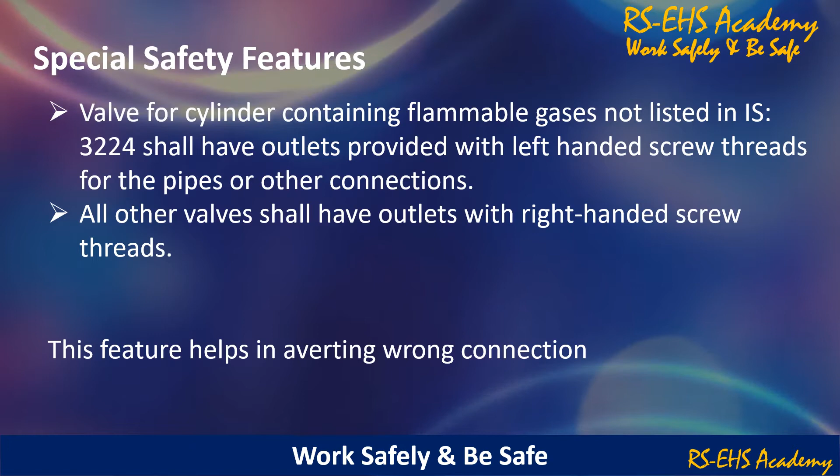Cylinder safety relief devices. The cylinders manufactured in India, if fitted with safety relief devices in their bodies, shall have them manufactured and maintained in accordance with IS 5903. The cylinders containing obnoxious or poisonous gases shall not be provided with any safety device.

Competent in charge for the operations. Every person holding or acting under a license granted under these rules shall, whenever cylinders are filled, loaded, unloaded, examined or tested, depute a competent and experienced person to be present and to conduct any of the said operations, and the name, qualification and experience of such personnel deputed in each shift shall be furnished to the Chief Controller or Controller for considering filling permission round the clock.

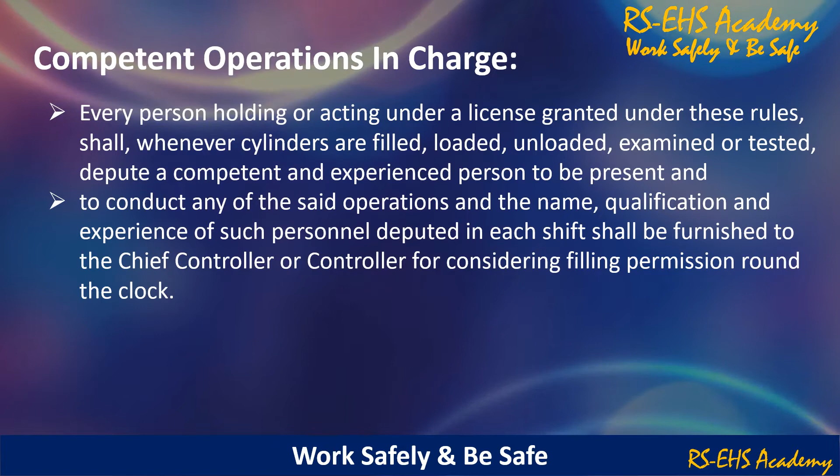Cylinder filling restrictions and repairing. Welded cylinders shall not be used for filling any permanent or high pressure liquefiable gas like boron trifluoride, carbonyl chloride, that is phosgene, chlorine trifluoride, cyanogen chloride, hydrogen cyanide and hydrogen sulfide.

No person shall repair or cause to repair any leakage in the body of a seamless gas cylinder. Welded or brazed cylinders showing leak at any place other than the welded or brazed seams shall not be repaired and shall be rendered unserviceable.

Storage of cylinders. The cylinder shall be stored in a cool, dry, well-ventilated place under cover and away from boilers, open flames, steam pipes or any potential sources of heat, and such place of storage shall be easily accessible. The storage room or shed shall be of fire-resistant construction.

Thin wall cylinders such as liquefied petroleum gas cylinders and dissolved gas cylinders shall not be stacked in a horizontal position. The cylinders containing flammable gases and toxic gases shall be kept separated from each other and from cylinders containing other types of gases by an adequate distance or by a suitable partition wall.

The cylinders shall not be stored under conditions which will cause them to corrode. The cylinders shall not be stored along with any combustible material. Empty cylinders shall be segregated from the filled ones and care shall be taken that all the valves are tightly shut. For an example, we have shown oxygen gas cylinder storage here.

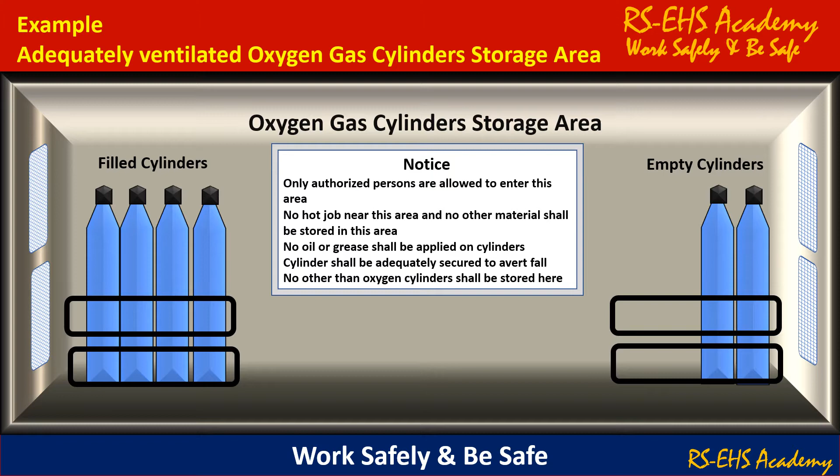Cylinder subjected to the action of fire. A cylinder exposed to fire shall not be used unless it has undergone proper examination and hydrostatic or hydrostatic stretch test. Dissolved acetylene cylinders which have been damaged by fire shall be condemned and destroyed by a person conversant with hazards involved in handling of dissolved acetylene cylinders and also capable of handling a situation arising out of accidental explosion of cylinder during condemnation.

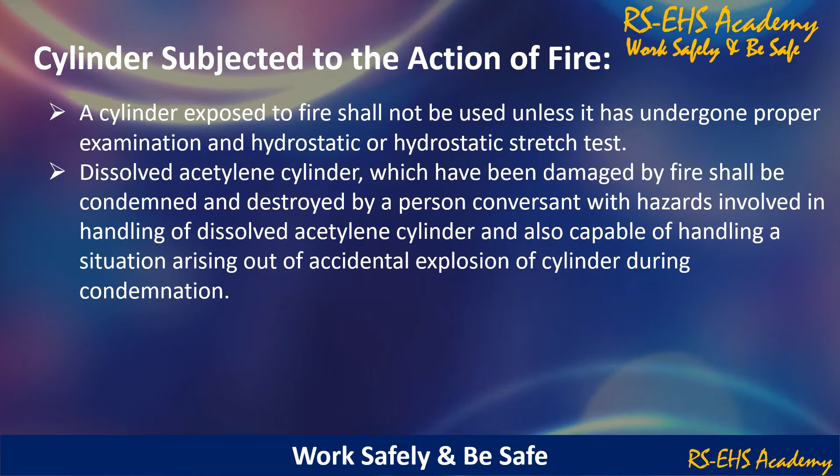Condemning of cylinder. Any cylinder which fails to pass periodic examination or test, or which loses in its tare weight by over 5%, or which for any other defect is found to be unsafe for use, or after expiry of the service life of the cylinder, shall not be filled with any compressed gas and shall be destroyed by flattening it as a whole or after being cut into pieces in such a manner that the pieces cannot be again joined together by welding or otherwise to form a cylinder, under intimation to the owner of the cylinder as specified in IS 8198.

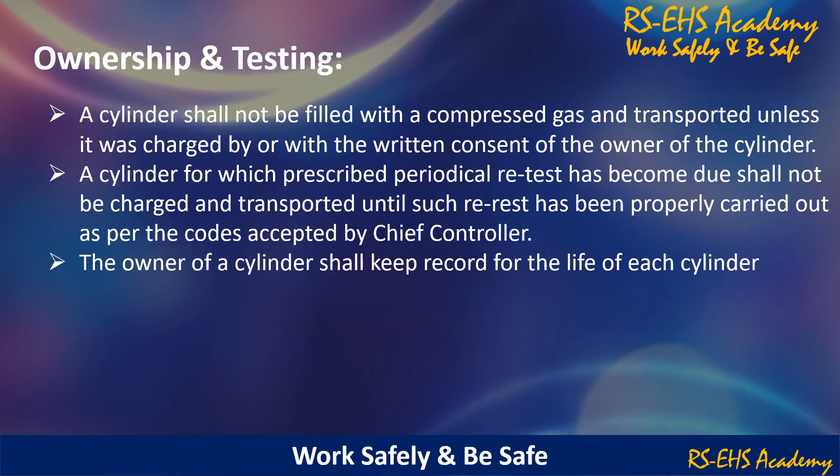Ownership and testing. A cylinder shall not be filled with a compressed gas and transported unless it is charged by or with the written consent of the owner of the cylinder. A cylinder for which prescribed periodical retest has become due shall not be charged and transported until such retest has been properly carried out as per the codes accepted by the Chief Controller. The owner of a cylinder shall keep record for the life of each cylinder. Let us go through the additional requirements for dissolved acetylene cylinders.

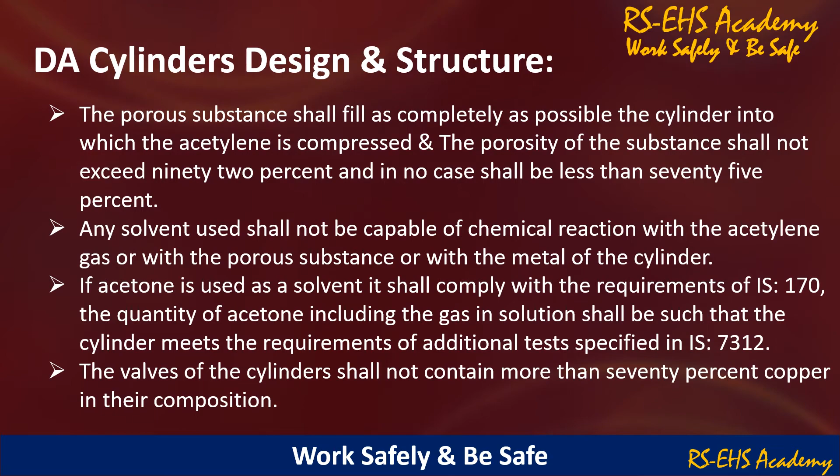DA cylinder design and structure. The porous substance shall fill as completely as possible the cylinder into which the acetylene is compressed, and the porosity of the substance shall not exceed 92% and in no case shall be less than 75%. Any solvent used shall not be capable of chemical reaction with the acetylene gas, with the porous substance, or with the metal of the cylinder. If acetone is used as a solvent, it shall comply with the requirements of IS 170. The quantity of acetone including the gas in solution shall be such that the cylinder meets the requirements of additional test specified in IS 7312. The valves of the cylinder shall not contain more than 70% copper in their composition.

For easy understanding, the picture shown here is showing dissolved acetylene cylinder design and structure. First picture is showing DA cylinder with valve protection cap. Second one is DA cylinder without valve protection cap. Third picture is showing DA cylinder side cut section showing mesh. Fourth, DA cylinder side cut section showing porous rock material which is filled in the cylinder. And fifth one is showing DA cylinder side cut section showing acetylene dissolved in acetone.

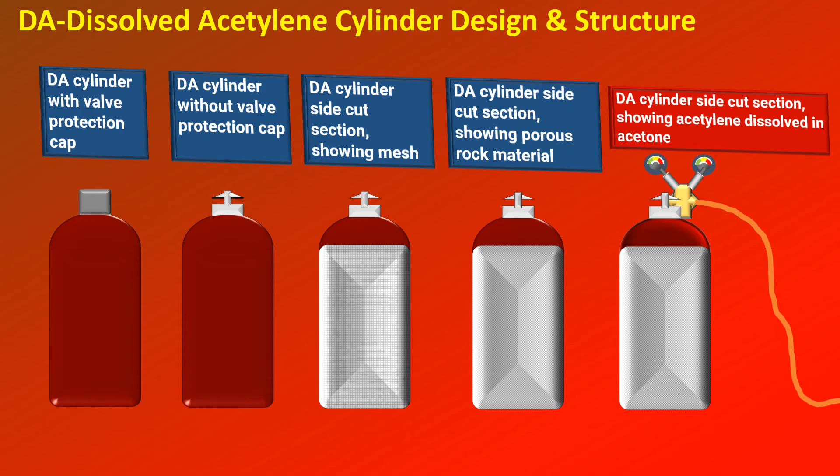Requirements for DA cylinders. Every cylinder shall have permanently and conspicuously marked upon it, or upon a brass plate soldered to it, the name of the manufacturer and the words acetylene properly compressed into porous substance, and shall bear the following markings, namely serial number and identification of manufacturer, number of the standard, test pressure, the date of hydrostatic stretch test with code mark of the place where the test was carried out, date of filling of porous mass, water capacity, a symbol to indicate the nature of heat treatment, identification of porous mass and porosity percentage, tare weight inclusive of valve, inspector's official mark, and maximum gas capacity.

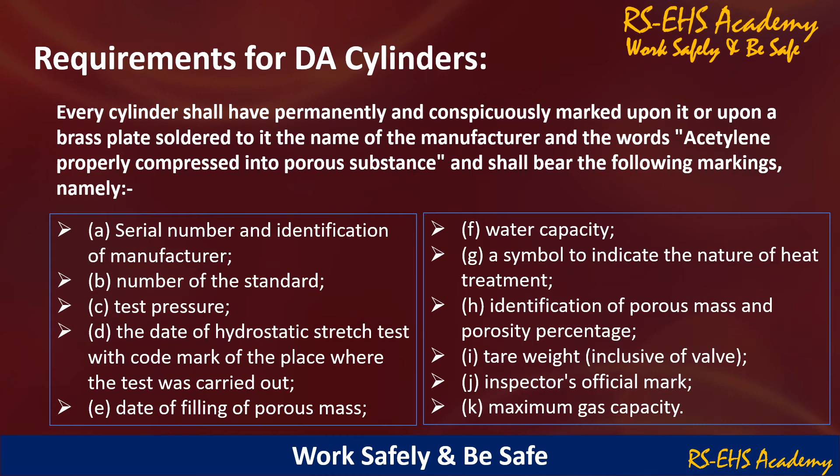Licensing and inspection of DA cylinder. Whenever a cylinder is charged with acetylene, it shall be subjected to a thorough visual examination in accordance with IS 8433. The compression of the acetylene gas into a cylinder shall be carried out only on such premises as are licensed by the chief controller or controller.

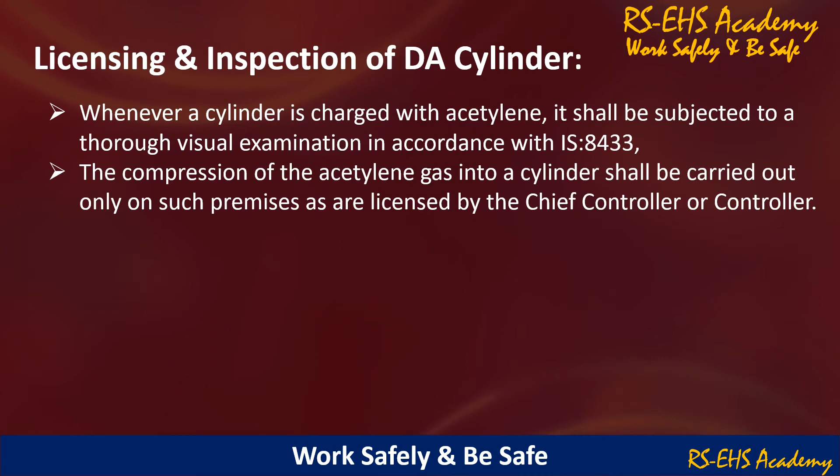Record keeping of DA cylinders. Each firm charging acetylene in cylinders shall keep a record of every cylinder charged by it, that is for each charge, the date of charging the cylinder, the empty cylinder weight without gas, the weight of solvent charged before gas charging, full weight of the cylinder, and the date on which solvent has been added, the dates on which the cylinder has been thoroughly examined as provided in Rule 39, the results of each such examination and the name of the person carrying out such examination, and in the case of cylinders first issued by the firm, the tare weight of the cylinder including porous substance and acetone or other solvent, the nature of the solvent, and the maximum pressure allowed in the cylinder should be recorded. The record shall be open for inspection of the chief controller or the controller of explosives.

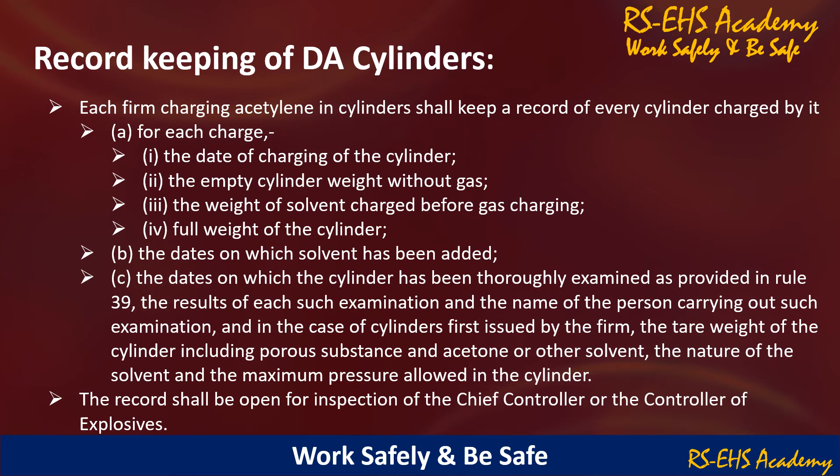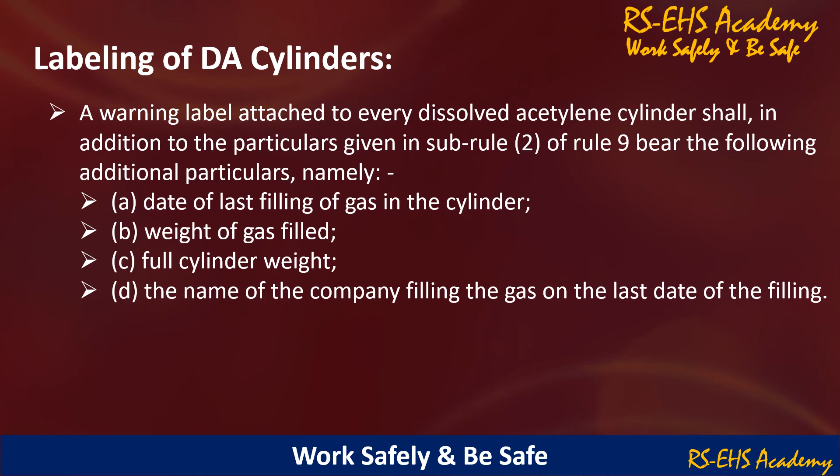Labeling of DA cylinders. A warning label attached to every dissolved acetylene cylinder shall, in addition to the particulars given in sub-rule 2 of Rule 9, bear the following additional particulars, namely date of last filling of gas in the cylinder, weight of gas filled, full cylinder weight, and the name of the company filling the gas on the last date of the filling.

Gas cylinders handling and use. The cylinder shall be adequately supported during handling. Conveyors, trolleys, and cradles of adequate strength shall, as far as possible, be used when moving the cylinders, and care shall be taken to avoid any damage to its wall. The cylinder shall be handled carefully and not be allowed to fall upon one another or otherwise subjected to any undue shock. Sliding or dropping the cylinder is prohibited. Liquefied petroleum gas cylinders and cylinders containing liquefiable gases shall always be kept in an upright position and shall be so placed that they cannot be knocked over. Open flames, lights, mobile phones, lighting of fires, welding and smoking shall be prohibited in close proximity to any cylinder containing flammable gases, except those in use for welding, cutting or heating. Working places shall not be classified as storage place for the purpose of licensing.

General precautions. The cylinder together with its valve and other fittings and the identification color shall always be maintained in good condition. No oil or similar lubricant shall be used on any valves or other fittings. It shall not be subjected to any heat treatment or exposed to a high temperature or to the sun, or stored with any other flammable or explosive material. A cylinder containing compressed gas shall always have its valve securely closed so as to prevent leakage. If it leaks, the cylinder shall be removed to an open space where it is least dangerous to life and property, and the filler shall be informed. Neutralization or scrubbing system shall be provided in the cylinder filling and storage area for toxic and corrosive gases. Emergency alarm and adequate emergency handling equipment or kits and protective equipment shall be provided in the toxic, corrosive and flammable gas storage sheds.

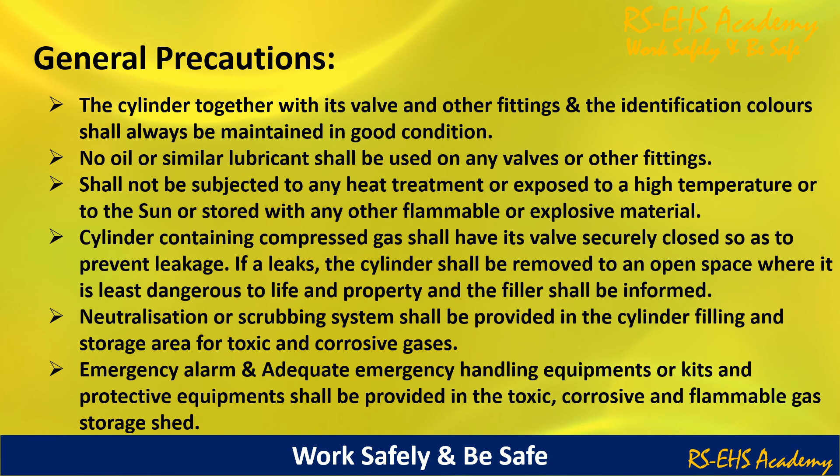Thank you for watching. Please note that the video is highlighting the salient features of the regulation. You have to read the regulation.